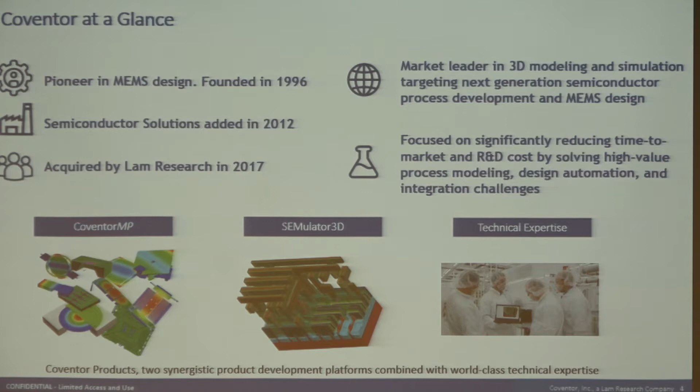Let me say a few words about Lam Research. It's one of the largest semiconductor equipment companies, now serving 40 years; basically all chips we use today, advanced logic, advanced memories, specialty technology like MEMS, have been fabricated in some way with Lam equipment. It provides the standard areas of processing, like deposition. Lam is very good in etch; that's where the company started. The founder, David Lam, was one of the inventors of plasma etch. We also have strip and clean, and a number of growing service and support products.

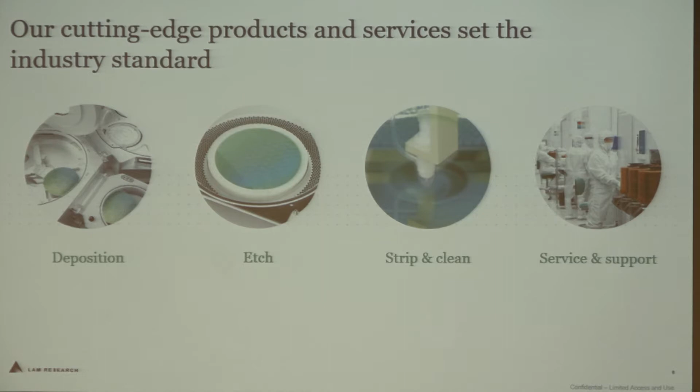I didn't want to show a lot of financial numbers, but the company is a big player in this industry, and we are investing in our future. So we continue to work with universities. We have a number of research and academic programs and university programs where we collaborate actively with universities around the globe. And I give you just this number, 1.5 billion that Lam has invested since 2001 into research and development, so quite a large number.

And we have facilities also in-house in Fremont, where the company is headquartered, at the Rick Gottscho lab, as well as a new tech center in Korea. And obviously, as it is a manufacturing company, there are manufacturing facilities around the world, based in US, in Oregon, in California, but also in Asia.

So it's not all about hardware, right? One of the reasons why Lam acquired Coventor is to reinforce the modeling part, the virtual simulation, virtual processing part, where we add value. There's also predictive analytics and different types of support that certainly grew over the last 2-3 years with the COVID pandemic. More important, which is now an industrial standard, to virtually support customers worldwide.

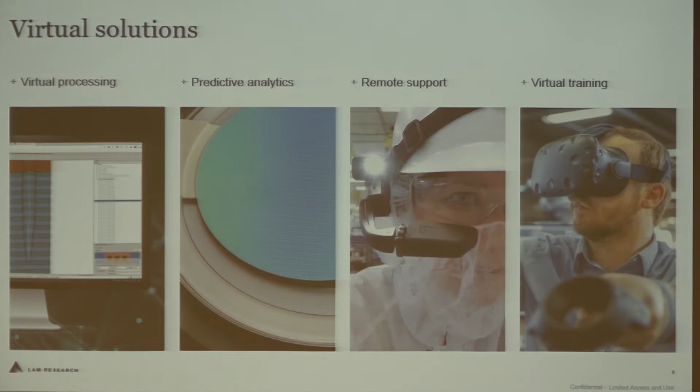So now about computational products. So this is the division that I work for, and I have also here a colleague with me, Matt Cameron, who actually came out with his PhD from MIT. So we as Coventor are basically a part of this division that was born out of the merger between the companies. So we keep our Coventor name, we keep our entity, and we keep developing our external products, which is CoventorMP for MEMS design and simulation, and SEMulator3D for semiconductor process modeling.

But in addition, we have a number of internal products that we develop, which are exclusively for internal usage on virtual process simulation and Lam business systems. And independent if it's internal or external, we collaborate with our customers, with our MEMS and semiconductor external customers, but also a lot with the Lam Research engineering community, which obviously has a large and deep know-how on process simulation. And underpinning this, we use a number of competences, data science, machine learning, that are shared between this group.

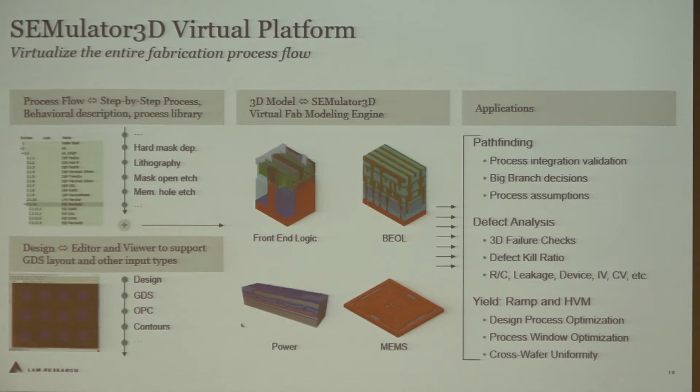And we also do support the manufacturing side by estimating yield, helping with ramp up, playing between design and process. So what is the variation on the process? How does it affect the design and vice versa? And process window studies and cross-wafer uniformities.

For the remainder of the talk, I would like to talk about the product line my team is working on. We now call it Coventor MP. MP stands for MEMS platform or multi-physics. It's a platform composed of CoventorWare. That was the original product of the company. In earlier days we called it MEMCAD, right? That was the first name, and then the name changed to CoventorWare. It's a suite of different field solvers, finite element types of field solvers.

And over the last, let's say, 10 years, we developed a complementary suite, which we call MEMS+, which is more compact modeling. So you can do device modeling, but we also use this platform to do combined device and system simulation. Similar to SEMulator, we use the layout data, design data as input, and then have a process and material description to combine those and build a model.

And because we want to be different from other standard tools, our focus is on having models that are fast enough for prototyping, but also system integration. Accuracy is important. You need to match reality to be at a level that the user expects, and overall, automating the design process, going from the process to device to system, is something that we implemented.

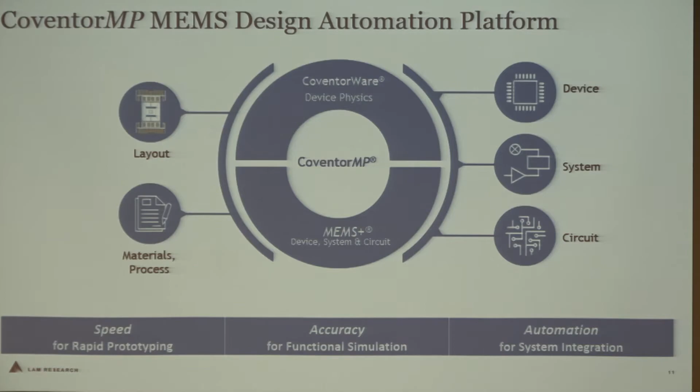Talking about a few applications, we don't want to do everything. We focus on what I call the traditional MEMS market, so micro-electromechanical systems. If things are moving, these are usually devices we can handle well. Traditionally, we are very good at gyroscopes and accelerometers. Gyroscopes especially are getting more and more complex in geometry.

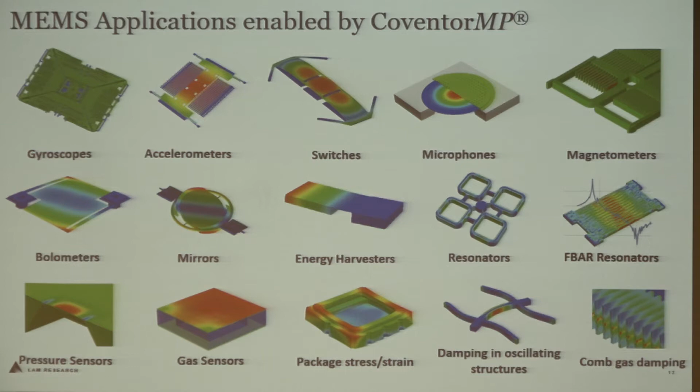Microphones: the platform is used by the major companies developing microphones. Also actuators like switches or mirrors, or maybe more research devices like energy harvesters or other types of mechanically moving structures. So this is the type of devices we cover. We don't cover, for example, microfluidics. This is something we decided to leave to others.

Okay, after the first introduction, let me talk about some of the challenges we see. I start with a slide that I made maybe 15 years ago, maybe older. But while the industry continued to evolve and we continued to develop our products, most of these challenges are still true today. MEMS are inherently multi-physics, and this is coupled. You have the mechanics coupled with electrostatics. You have damping mechanisms associated with it. Sometimes you have other physics like piezoelectrics. But you need to consider all these physics in a coupled way, which is non-trivial.

And MEMS are inherently different from ICs because they are 3D structures, and these 3D structures can be simple beams or simple membranes. But if you look at advanced devices, like a gyroscope, it's getting more and more complex. It's like, as the British would say, Victorian mechanics on a micro scale. So interesting geometries, but complex to handle.

And whatever the MEMS device is, a MEMS device is never on its own. You need to have electronics, and the electronics need to talk to the MEMS device for readout and for actuation. So what is the approach to co-design the system? You have a multi-physics system, and you have the electronics, where there is a whole world of very well-established methodologies. So you need to bring these together.

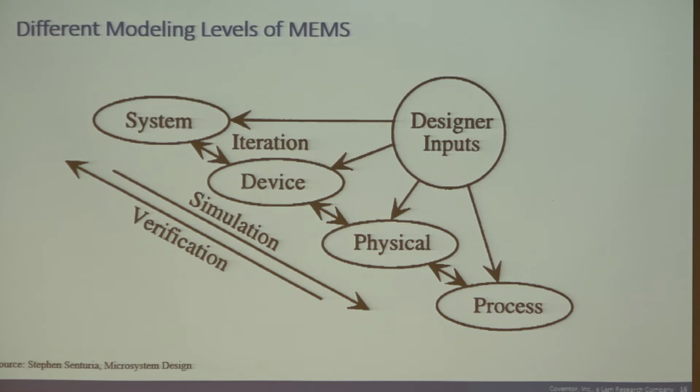So right, you can start from the process and you can end up in the system, which is here called verification. You can also call it bottom-up design. This is the procedure or the flow that you find mostly implemented in our tools and in other, let's say, methodologies. Or you can go from simulation. You start with the system level and you end up with the definition of your physical parameters. But in a way, this is the flow that you find in our tool and in other methodologies as well.

So now I already, I think, touched on this, but there are different phases, conceptual, detailed, optimization, verification phases during your development, and there are different levels. There's the device level, there's the system IC level, and there's also the package design. And in a conventional flow, you use analytical modeling, which is good enough, but then if you want to increase accuracy, you use finite element analysis for detailed design and optimization.

So one of the challenges is that this finite element analysis is not really compatible with an IC or system design flow, because it's multi-physics. You can couple it, but it usually takes time, and in some cases, if the complexity is large enough, it's not possible at all. And so there's no automation between the MEMS and IC world. It's a wall separating those.

And then if you go to package design, again, it's finite element analysis, but how do you link this back to the IC design or to your MEMS device design? So it's an ad hoc method. And these areas are really not connected. So that's what we tried to change over the last 20 years, right? So we introduced a method called compact modeling. There are other ways to characterize it, and I will explain later on what this exactly is.

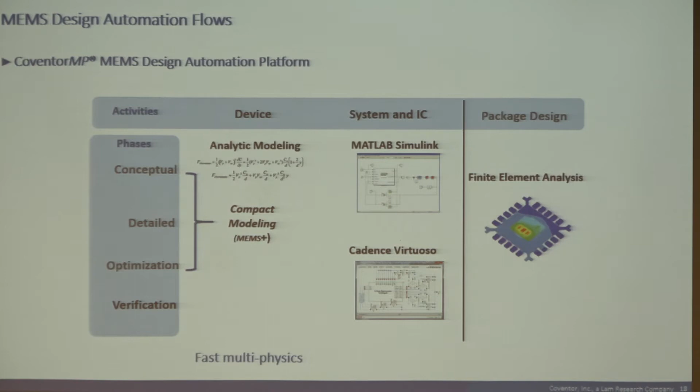And this allows you to have a multi-physics design on a conceptual and also detailed level, but in a fast way, right? Because you give up some degrees of freedom and you gain simulation speed. And by doing this, you are able to have a model that can be shared not only on the device, but also on the system level. So you can use this in simulators like IC simulators from Cadence, Virtuoso, or MATLAB Simulink. And this is in an automated way.

And then also you can include a package design, which is finite element based, for example, deformation of the package. So these are larger structures, but you can now feed back this deformation to the MEMS device to incorporate the temperature-induced deformation of packaging, affecting the tiny details of your MEMS device.

And you always need traditional finite element analysis for certain verification, for certain specific aspects of this flow. So for example, from MIT, there's FastCap, an electrostatic solver, which is still used in industry for very accurate, precise simulations.

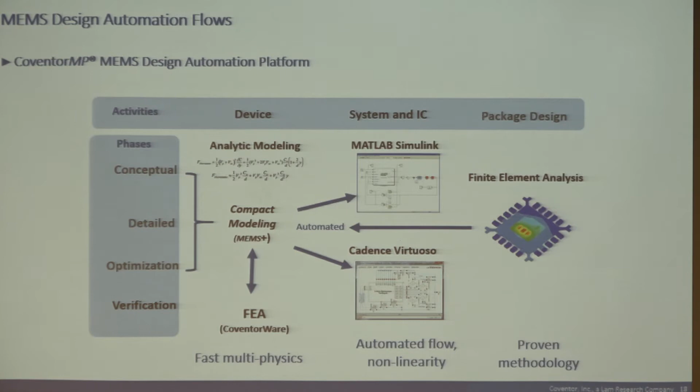And complementary to this, you can use a library of components, like a Lego system, so beams, plates, shells. And both components now work well together, so in a way they are combined. I show an example later how this would work.

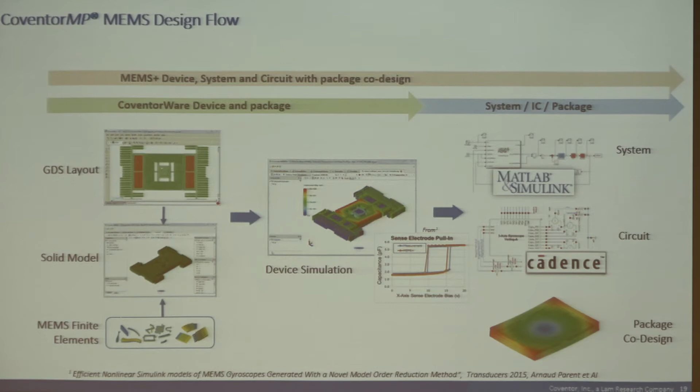But the end is you get a 3D model that has multi-physics behind it, where you can do device simulation on different levels, but you can also use the same kind of model, use it in a different form, a different view, to simulate it in MATLAB Simulink or in Cadence simulation. And it also goes together with package co-design.

And one method we use to take this into account is conformal mapping theory. It allows us to be very accurate, detect small changes in capacitance, and it's very fast, right? So this is what we use for the electrostatics, and we combine this with the mechanics. Depending on your structure, you are able to use shapes like beams, Bernoulli or Timoshenko. Different mechanical models are behind this. So if you know that a beam is a beam, you are able to gain simulation speed by using specific mechanics theories. If you know that's a shell, you can apply specific shell models to this.

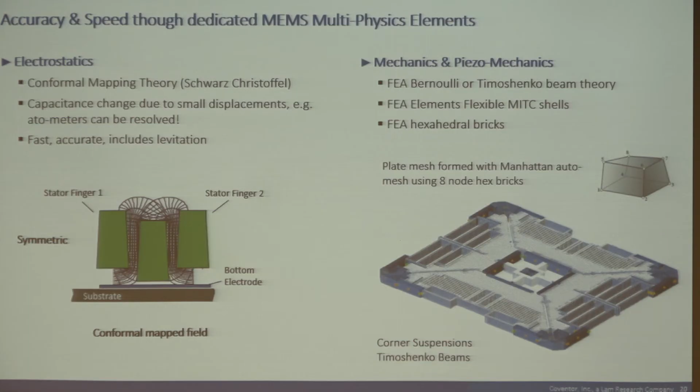And then we also have model order reduction, because typically these compact models run 10 times faster, just an order of magnitude, than standard finite element. If you want to combine it into a system with electronics, it can be too slow. So we apply standard reduced order modeling methods to further decrease the number of degrees of freedom for the systems to be able to run transient simulations and combine electronics and multiphysics mechanics.

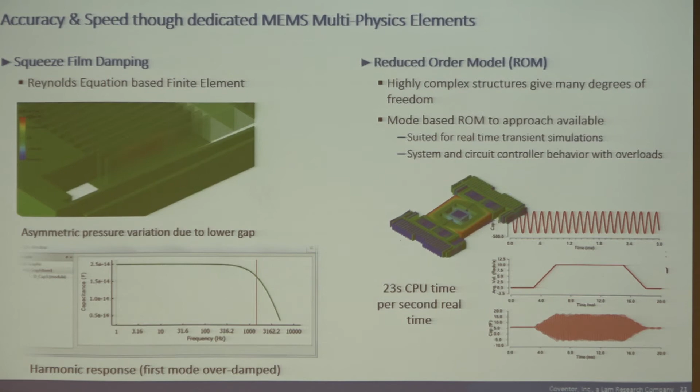So all this is ending up into a design flow, which I call digital qualification, because we really like to go from concept to manufacturing and use this flow. So 3D model entry, which needs to be process sensitive. You can then do device simulation. And thanks to the accuracy and the speed of the models, it allows you to run lots of experiments.

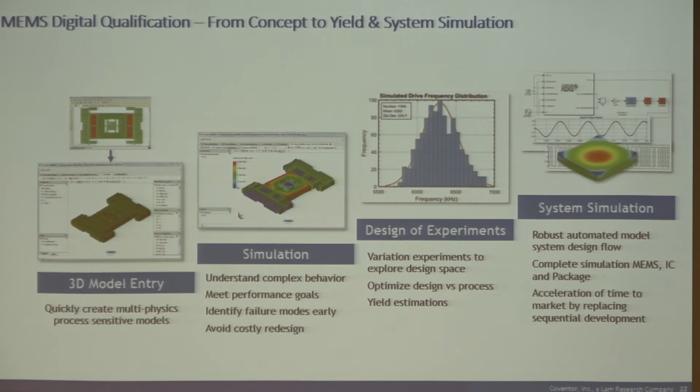So this is done when you create your design to optimize your design, but also then if you go into manufacturing to evaluate manufacturability and play between design and process. And the next step is then to go over into the system level, where you handle the complete system, MEMS, IC, and packaging.

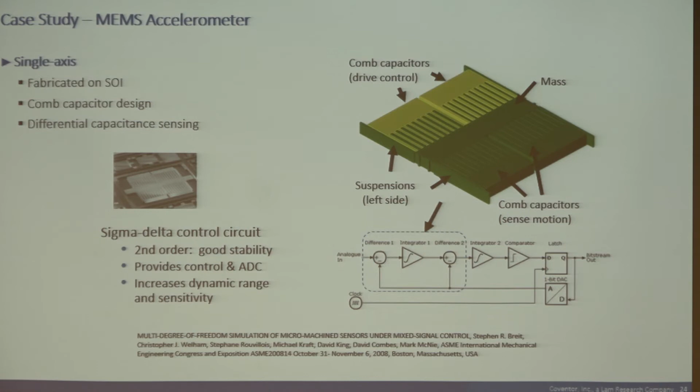Okay, with this, I go over to show a few case studies to demonstrate basically this design flow. This is quite a simple structure. You see a comb drive accelerometer, SOI based, with comb capacitors for drive and comb capacitors for sense with some suspension. All this is implemented into a sigma delta control circuit. The next slide shows you how to basically build up the system.

So there are two ways to do it. Either you can do it from the library of building blocks. So you take the comb shapes, you take the suspension beams, you take the plates. Obviously, that is all parameterizable. And you can also use MATLAB scripting to automate it. That is one way. The other way is that you use a layout.

As I said earlier, most engineers prefer to use this method, but then from a layout you need to match the components, and we do this by applying some pattern recognition algorithms. So if you draw a comb shape, the software is able to identify this as a comb or as a beam. And this allows you to relatively quickly create a 3D model, which is not only a 3D representation, but which has all the multiphysics behind it. So very MEMS specific, but very powerful to create fully coupled multiphysics models.

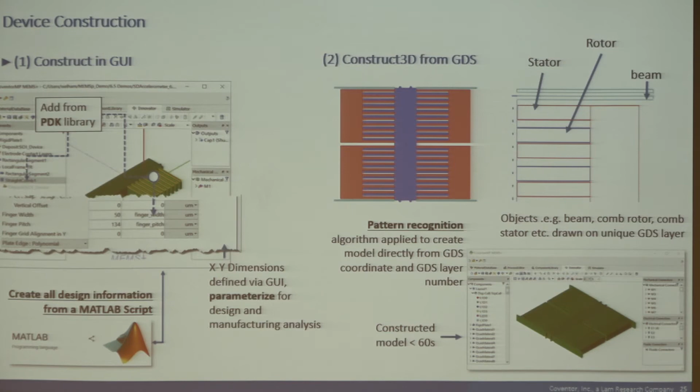And once you have done this, it allows you to run standard simulations you would do in MEMS design, static deformation due to stress, modal analysis, frequency analysis. This is one of the most basic but still most important simulations you run, and you need to be very accurate, not only in the first modes but up to 20, 30, 40, even more modes. And which is, mechanically speaking, for complex systems, not always trivial.

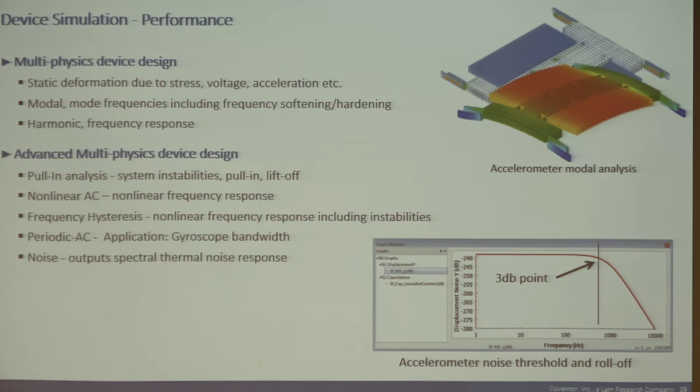And then you have more advanced analysis, pull-in analysis, right? That's how we started here at MIT, coupling mechanics and electrostatics. It's still a problem that can create instabilities, so you need to carefully follow the algorithm to allow a simulation, non-linear aspects of this, frequency hysteresis, and more things like noise. For example, for a microphone, noise is a very important parameter, the most important maybe.

So once you have done these simulations, you can do also more what we call reliability related or verification analysis. So this is showing an example of still the same accelerometer where you can now apply a shock wave, because the model runs fast. The shock wave is a very complicated simulation, so a transient, non-trivial, and then you have contacts involved, which is one of the hardest problems to solve. But by having fully coupled systems, it allows you to run these shock analyses.

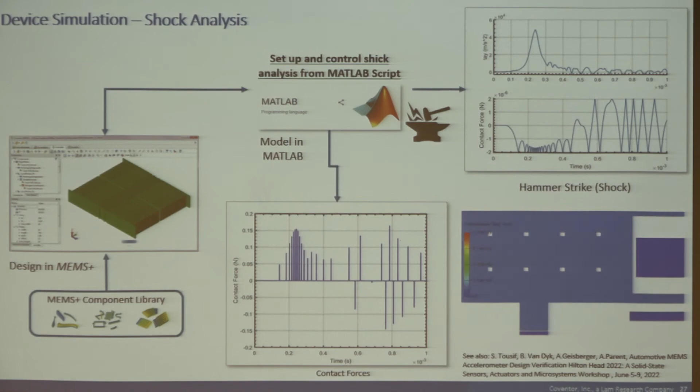It's a typical test used in automotive qualification, the drop test. You drop your device from 1 meter and it needs to survive. So this is a way how you can virtually anticipate how your device would react, also seeing it in 3D, fully understanding what happens, right? Because the electrical signal doesn't always give you all the clues. So this is a method. This year we actually published an article with NXP, one of the pioneers in this area for automotive sensors, and it's a technology flow that is now used.

But then you can now go over from the device to the system level, right? And I don't have a lot of explanation, but basically it's the same model or the order reduced model that you can now visualize in a different view. You have it as a MATLAB schematic, or you have it in Cadence as a Cadence schematic, but behind is the same model. So you share the same, you can call it golden model, between the mechanical multiphysics simulation for the device level, or you can use it on system simulation for MATLAB, or for the IC designer in Cadence, Simulink, and all goes back to the same model with the same parameters.

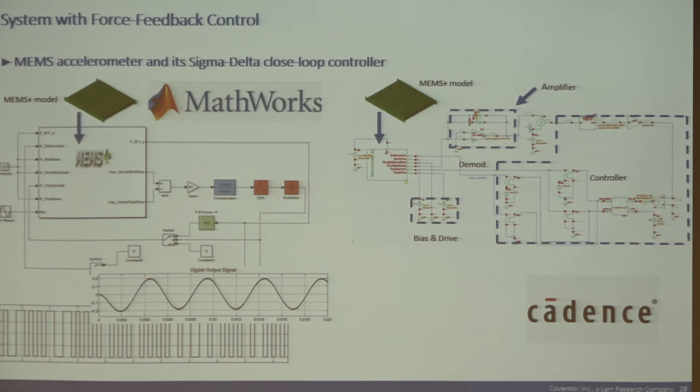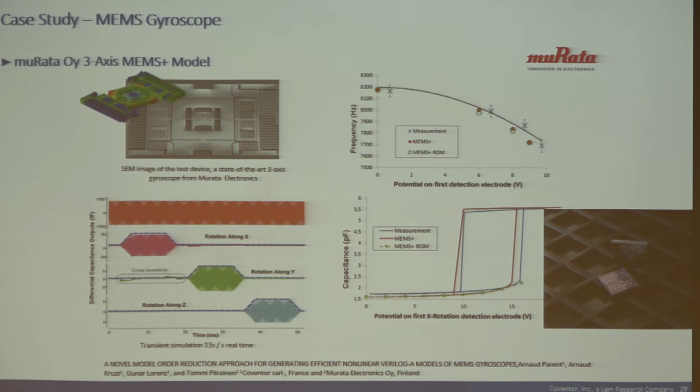So I have still time for a few more examples. So this is an example of a 3-axis gyroscope, like found in all smartphone devices. And here as well, this is a 3-axis gyroscope. A gyroscope, right, it measures Coriolis force. So you have the 3 axes.

So one axis you need to actuate. One axis is the rotation that you want to measure. And on the 3rd axis, perpendicular to those 2, you have the detection of the force that you would like to measure, usually by capacitance, right? So this shows the driving mode here, and then the sense signals according to the 3 axes.

And you see below a graph that shows basically the simulation of the capacitance change if you apply a bias to the electrode. So it's pull-in, pull-out behavior. So it's a fully coupled simulation, mechanics and electrostatics. Or you can also tune the frequency by applying a voltage, so there's a frequency shift.

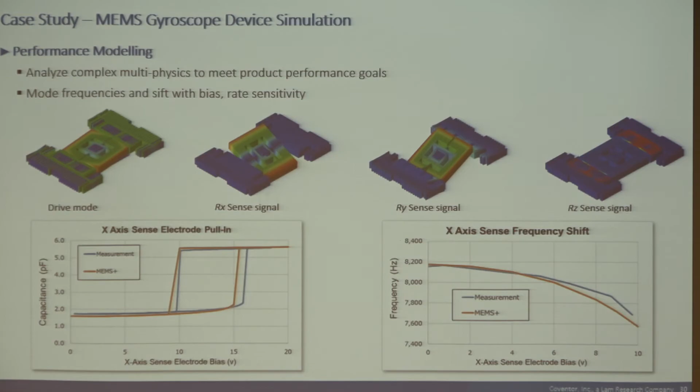And this device, right, if it goes into a package, it will change behavior because the package deforms. So this is the methodology that shows how we do some package simulations over temperature, very basic thermomechanical simulations. But the nice thing is you can now feed back this deformation to the device, and you can achieve a nice temperature sweep and see how the device function, the frequency changes, also a transient simulation changes in function of the packaging behavior.

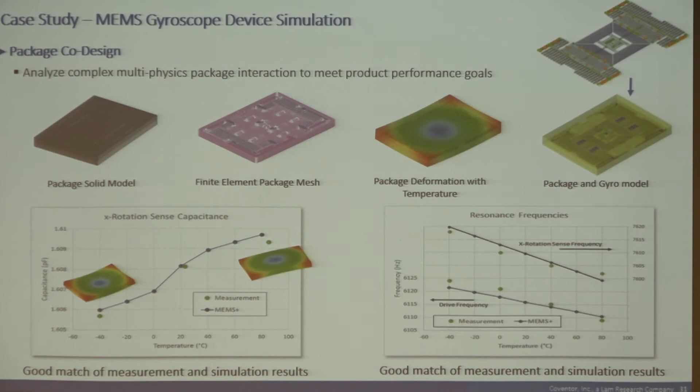One last example, and this is very simplistic here, but we now work with the best etch engineers in the world to better understand how the etch behavior of crystal silicon, deep reactive ion etch, is affecting the device behavior. And if you look at the requirements, for example, for gyroscopes or accelerometers in systems that help drive your car or other vehicles, the specification of these sidewalls is 0.01 degree. So it's a level that's very difficult to measure physically by SEM.

However, you would see these effects in your device in terms of what's called a quadrature error. It's an error signal that is created by this tilt. So if you have a predictive model, you can now use this tilt data and feed it into your model. You can also use CD, right? Tilt and CD. There might be also more complicated shapes than only a tilt angle that you can now simulate in your model, to understand what this quadrature error effect is.

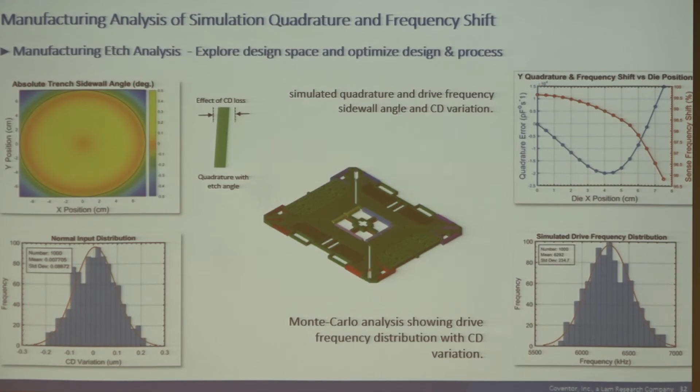So if you have experimental data, you can map your model to this experimental data, but you also can, for example, anticipate or predict the sidewall angle based on your electrical data. So again, sidewall angles that are physically difficult to measure. With your predictive model and the interaction between sidewall angle and electrical signal, you can understand what the sidewall angle distribution of the wafer is if you measure an electrical signal. So these are the problems that at the moment keep us quite busy and help our customers to move forward.

So in the last few minutes, I wanted to give also some examples of academic designs. It's a bit dated, but I like to show them because it was a nice contest that we did together with Cadence, one of our partner companies in electronic design, and a foundry, X-FAB in Germany. So X-FAB developed an SOI technology that allows to fabricate inertial sensors. And the idea of the contest was to see what else we can do. It was open to everybody, but mostly universities participated. Can we have other ideas that can use this technology?

So people could either use just the MEMS design, or only work on the electronic design, because it's a combined technology where you can have MEMS and electronics, or in the best case use both, right? Do a MEMS design and develop the electronics and put it together. And I just show you a few of the outcomes.

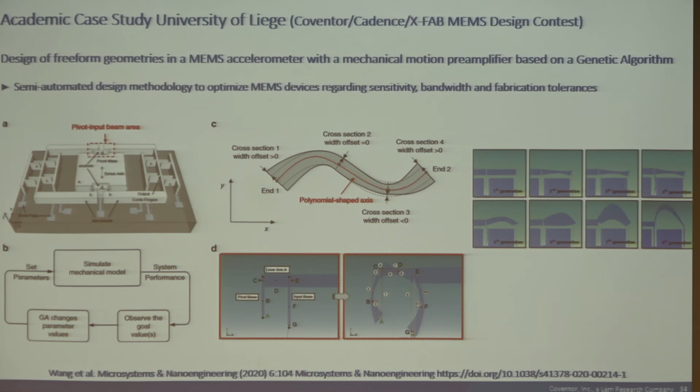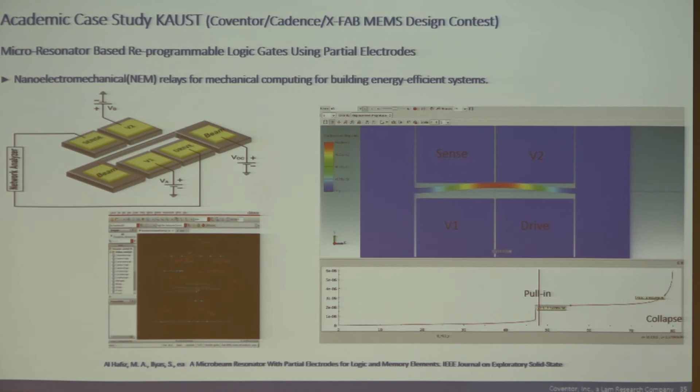Manufacturability is a different question here, but again, it allows you to find some unexpected geometries that you might not have found otherwise. Another example is this. It's a very simple structure, a clamp beam. In this case, the idea is to use it as a part of a programmable logic device. In this case, a simple mechanical structure, but well implemented together with the electronics to have a full microelectromechanical system co-simulated in its electrical environment.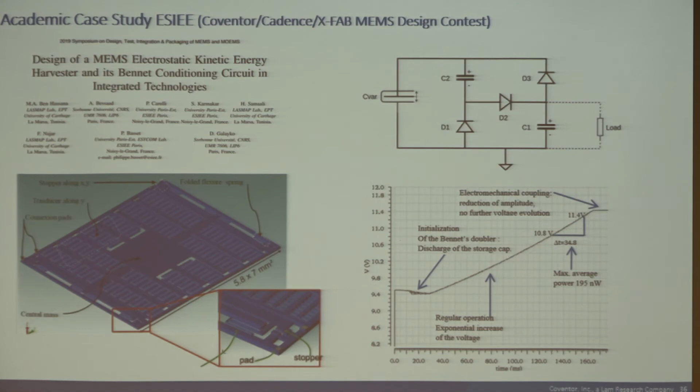So with this, I would like to conclude. So I hope it was not a very scientific talk, right? My background is MEMS design, it's not modeling. If you have more questions, my colleague Mattan Kamon is really one of our, what I would call, head scientists. And also Steve Senturia volunteered to talk a little bit about the history. So that's very nice of you, and I'm looking forward to also learn about this. Before this, I'd just like to conclude.

So over the last years, we contributed to help our customers tackle problems in multiphysics, applying reduced order models, looking now more and more at manufacturability aspects, right? The development time of MEMS continues to be still high compared to IC, so we believe we can help by combining the know-how from manufacturing with our design capabilities. And reliability will always be an issue where there are lots of research projects, so we don't think we can handle this on our own.

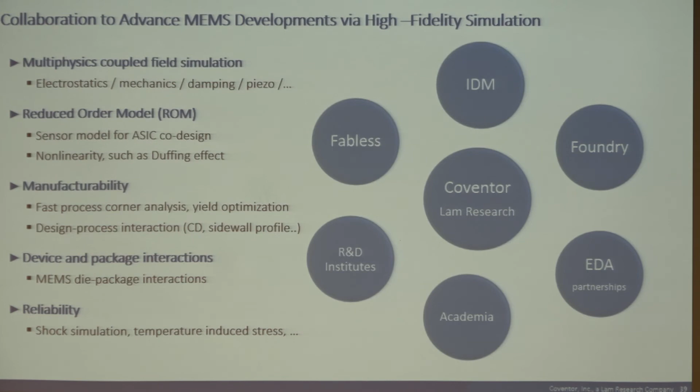So we work, first of all, with our customers, with EDA partners together, but also we are always open to collaborate with academia and research on new topics and new devices and especially new methods. With this I conclude, and I'd like to thank you very much for your attention.

Yeah, will this work? That's okay? Can I give you this one real quick? Would you put your early slide with the growth of MEMS up? I think it was your second slide or something. Way back. Yeah, the first. Because you started 1990. Keep going there. That one. Yeah. Whoop. Next slide.

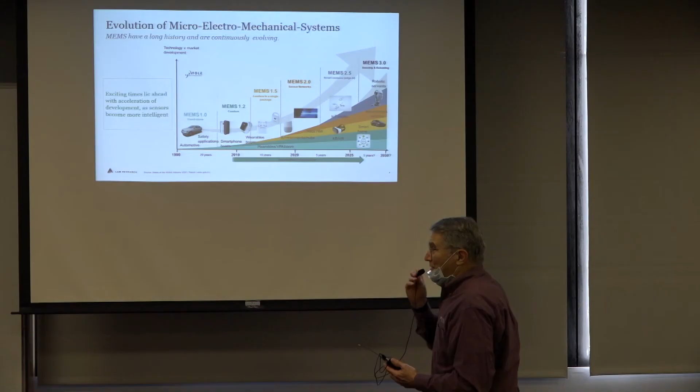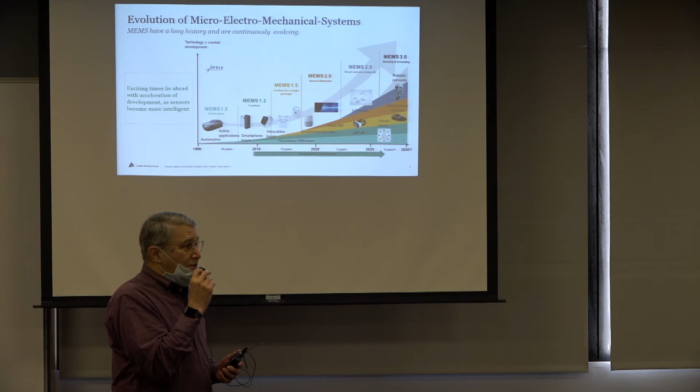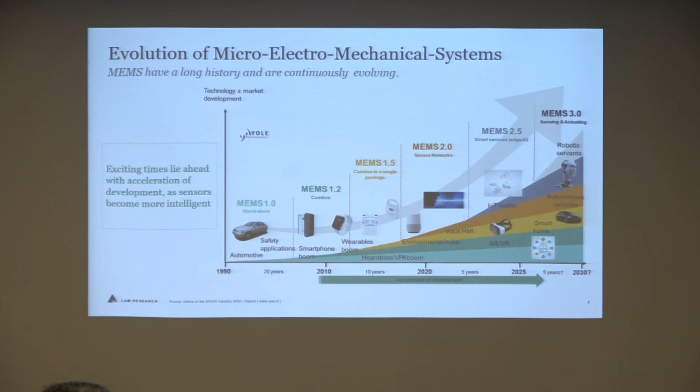That's it. You have it starting in 1990, but actually there was already a market for MEMS in 1990. It was mostly pressure sensors, blood pressure sensors, small sensors, almost entirely diaphragm etched. And this was a time in 1990 when there was enough interest in MEMS for a lot of people to be looking for new kinds of devices to make. And accelerometers, switches, mirrors were all on the agenda at that time.

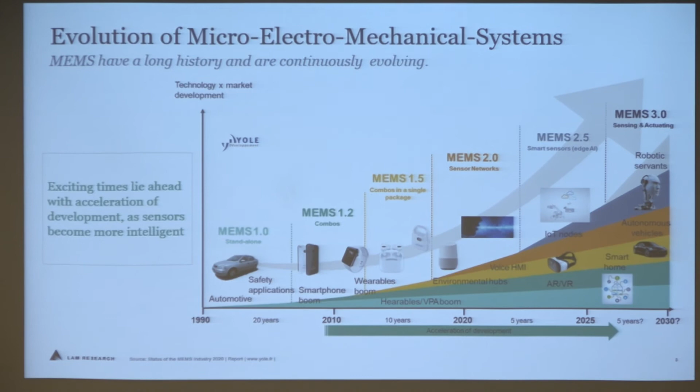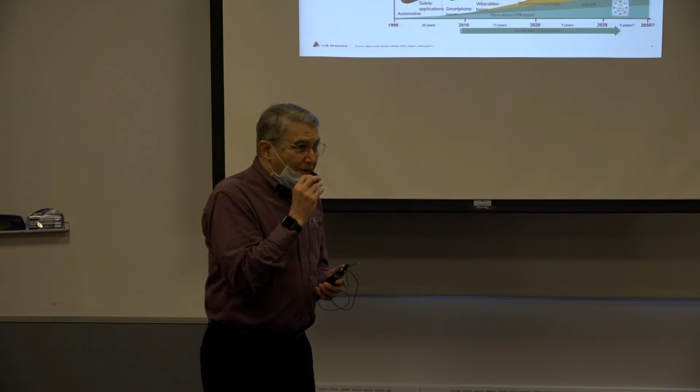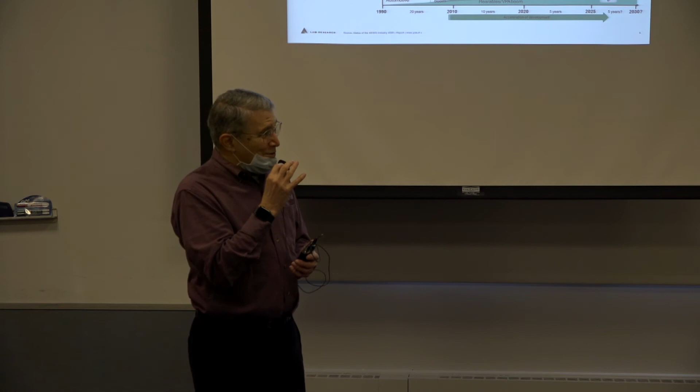Now, it's 2022 now, and I'm going to go back 35 years to 1987 in Tokyo at Transducers 1987, where I made an invited talk, and the slide that you showed from my book was basically in that talk. The design, process, system, materials were there as a proposal for how to accelerate the development of MEMS devices by creating integrated designs. That was in 1987.

It took a little while to get some funding, but I finally got some, and I had a group and a partnership. It was an MTL RLE partnership. I was the MTL person, and Jacob White was the RLE person. Jacob White had developed with his students the FastCap program for high-speed simulation of capacitance. And the reason that's a difficult problem is that it's external to the electrodes. So if you try to do it with finite elements, you have to fill all of space, whereas if you can do a surface-based calculation, it's much faster.

Mattan Kamon later did his work on FastHenry, which was an inductance simulator based on a similar approach of trying to use the physical structure rather than the external space as the basis for a simulation. My interest was in generating the 3D dimensions of the 3D model from the process flow. And that's what we worked on.

And together we created a system which we called MEMCAD. The glue, the person who put it all together, was John Gilbert, a postdoc in my group, and he, with Mike Jamolkowski, became the co-founders of Coventor in 1995, 1996, and they actually licensed from MIT not only the initial software, FastCap, and some of the other components that we had developed for generating 3D models from process flows.

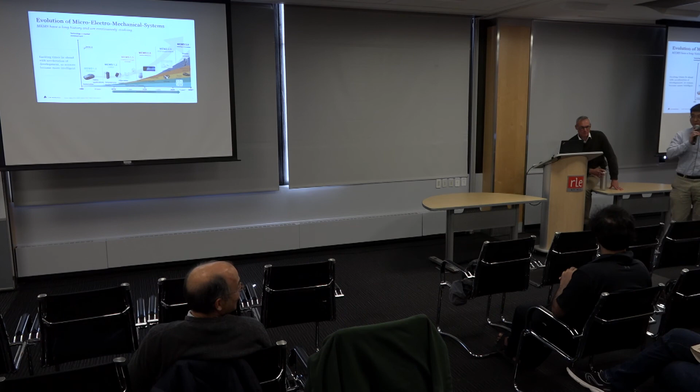Very impressive history. So now the talk is open to questions. Any questions? So maybe I can start with one.

So you showed that in 2018 there was a contest for using the Coventor and also Cadence software for MEMS design. Are there future plans to hold that kind of contest again? I would pretty much like so personally, but actually it was a lot of work, and we are a company, right? So if there is a consortium of partners working together, we are very happy to support this, because I think it was a great idea to basically use standard technology in terms of simulation and in terms of hardware, and to come up with new ideas. But it requires a certain sophistication of organization, right? So we're happy to support and help, but only with strong partners.

Yeah, thanks. Other question? Yeah, Tai.

As you said, packaging is always an issue that you have to consider along with the device. But lately, one of the things that has been coming up is that life has become more interesting in terms of heterogeneously integrating different technologies together with the package. What kind of challenges do you see, and how will these evolve over time, given the platform that you have, which has already tackled some of the problems, but is extending it?